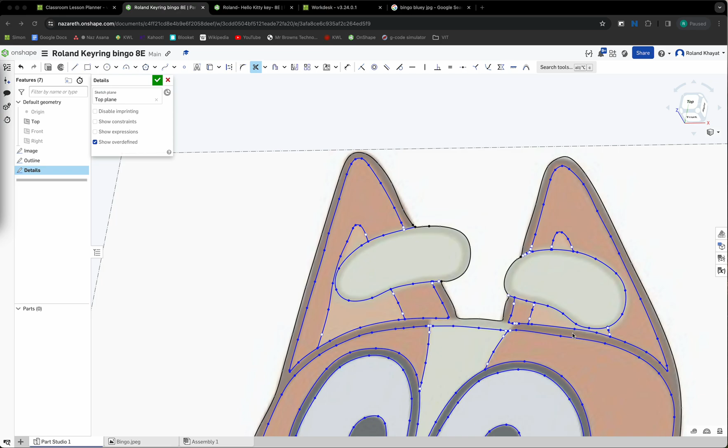Okay, so I've been drawing for a little while here and I've drawn all of the details. I've just gone around both sides there, and there's a line there, and they're all enclosed as possible, so there's no lines just sitting, not ending anywhere. Everything's connecting - this connects to here, connecting to there, creating a surface here, a surface in there. There's a surface there, there's a surface there. This surface here connects around - that's a big complicated one, but it goes all the way around there, so it's all connected.

And I just click the little green button so it saves it. And then here I can kind of highlight a little bit better so you can see what I'm saying. If I go... oh, okay, it's not doing it.

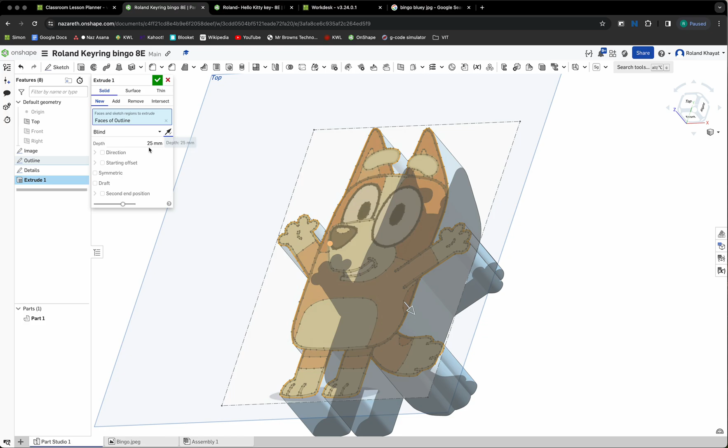Anyway, so now that we've created the details, what we're going to do is go to the outline and extrude. This extrude button, we need to go in the opposite direction, and we're going to go 4 millimeters.

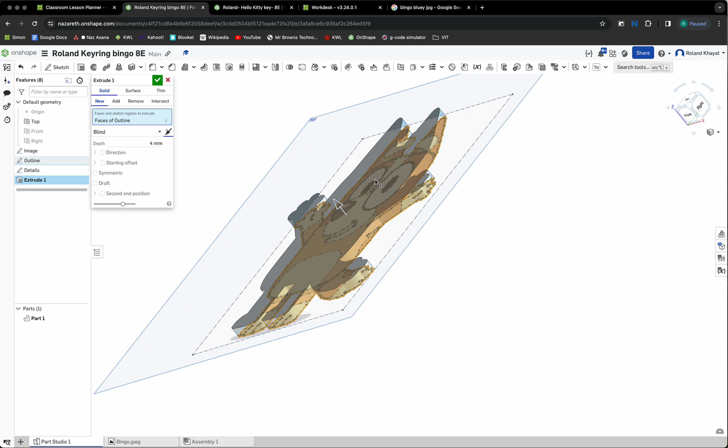So you can see that the drawing is here and it's going in that direction. We don't want it to go there, because then the part is on top of our drawing and we can't take the details out. So we need to go in the opposite direction so it's underneath, and then we could take the details out.

So extrude, so it's solid, new, that outline - that creates our base. Now the second thing that we want to do is extrude out the details.

So we're going to extrude. Now we want to add - and in here it says merge scope - we want to add to this part, so we're adding to that initial base bit. And then we're going to select which parts we want to extrude. So I'm just going to start off with this light sort of orange section.

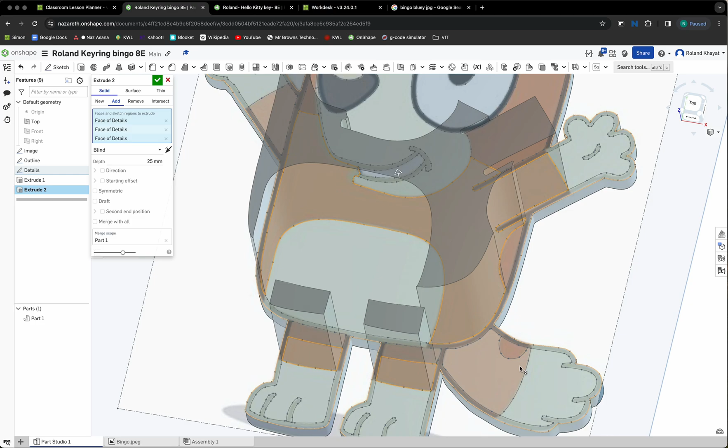So you can see it's kind of come out there - that's the light orange bit. Everything that's that color, I'm going to extrude it. You've got to kind of move the mouse around until it highlights what you want. All right, what else have I got? There's her other arm.

All right, so we don't want it to be 25, we want it to be, I don't know, let's just say 0.5. All right, so it's just coming out. That bit is going to be 0.5. Is that all right, all the same color?

Oh, actually, of course, I got these bits - that bit, and that bit, and that bit. So they're all 0.5, they're all coming out. They've all sort of come out a little bit. So now I want to do the black bits.

So wait a second - once I've done the extrude, it's going to hide the sketch. So we want to show the sketch again, and then we're going to do another extrude, and this is add, merge scope, the part, and then we're going to add the bits. So now we want to do the black bits.

So we're going to go to that bit again. The whole point here is that each bit that we go in and out is at a different thickness from the other color, so that when we print it, they will show at a different thickness. So that one was 0.5, this one we're going to make it 0.8 - all of the black is going to be 0.8.

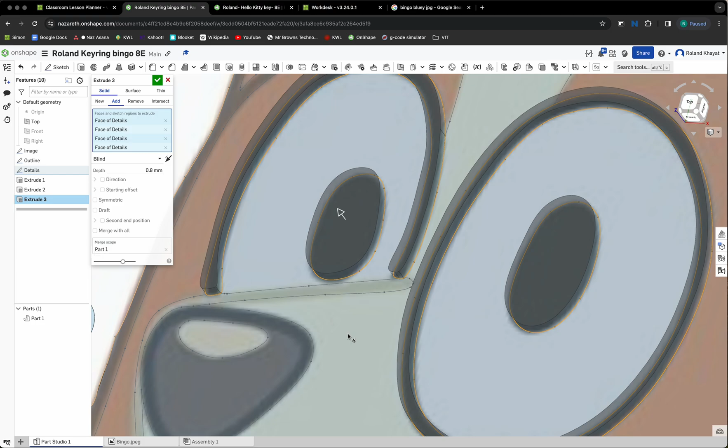Damn it. All right, so this is kind of the tricky bit, getting it to only select the bits that you want it to select. All right, so those bits are black. Actually, we're going to do the whole outside, so I don't know if it... hopefully I've done it right.

Oh, there you go, it's gone red, so there's something gone wrong here. There's something wrong with that line. I'm going to investigate - anyway, so I can hide this. So it was this sort of surface here, it's got a hole in it somewhere. All right, it's not working.

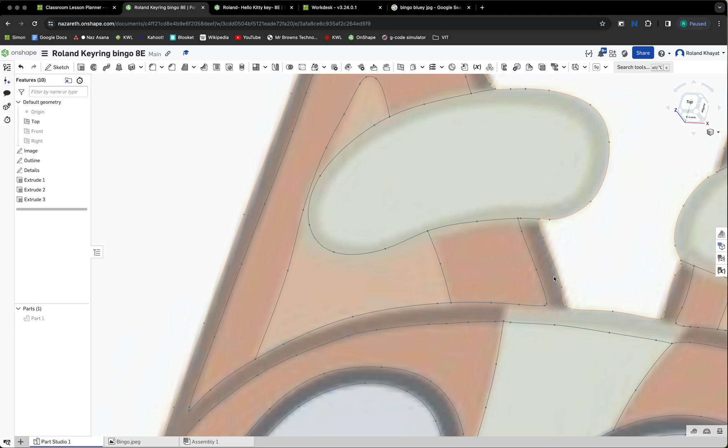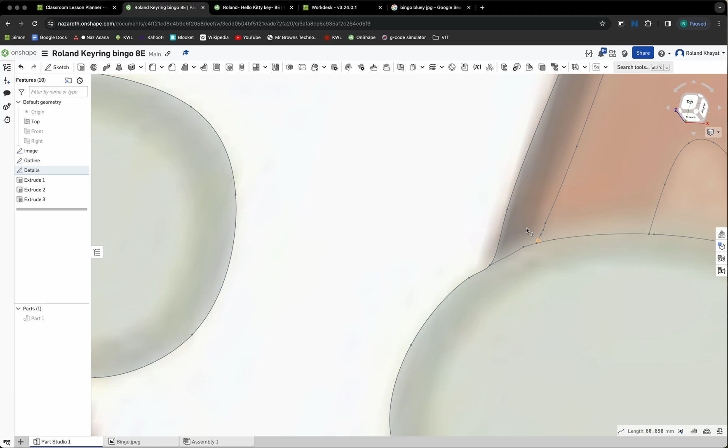All right, so I'm going to hide this part - this is probably the most complicated bit. So here it's closed, I'm just investigating - so that goes to this bit here, connects all around there, connects to there, which goes up and around to there. That's okay. Connects down to here. Yeah, I mean, this is a complicated shape.

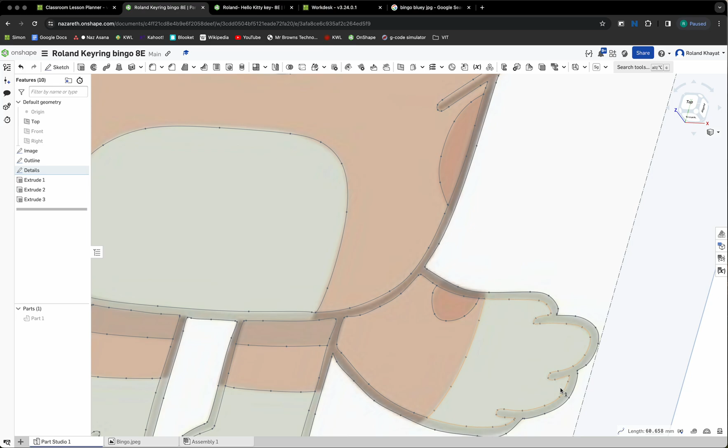All right, connects to there, connects all around in there. Strange, anyway, it does that, goes through there. Alright, that all looks okay. This bit here looks weird, so I need to get rid of this bottom line - it doesn't like these two line things.

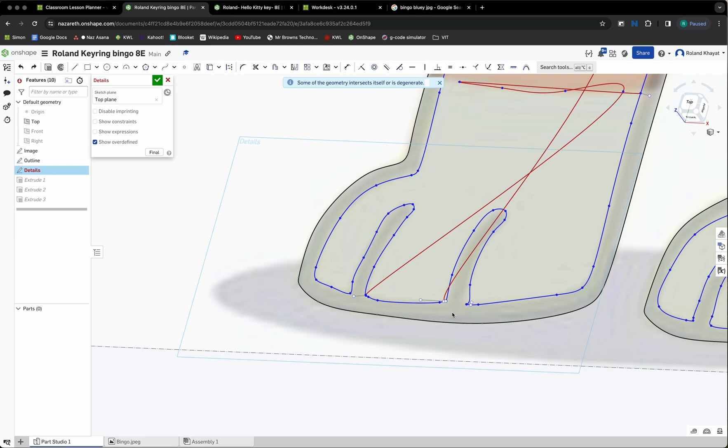So we've got to go into the detail sketch, use the trim tool, and I'm going to get rid of that bottom line. Alright, actually I'll get rid of that as well, because that's all part of it. Whoa, okay, didn't like that - Control Z. So as I said before, when it has constraints and things, it kind of messes things up. So it's a bit of playing around to get it to work.

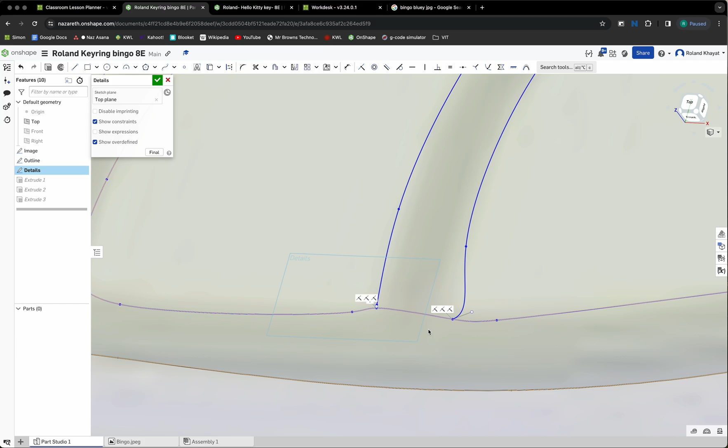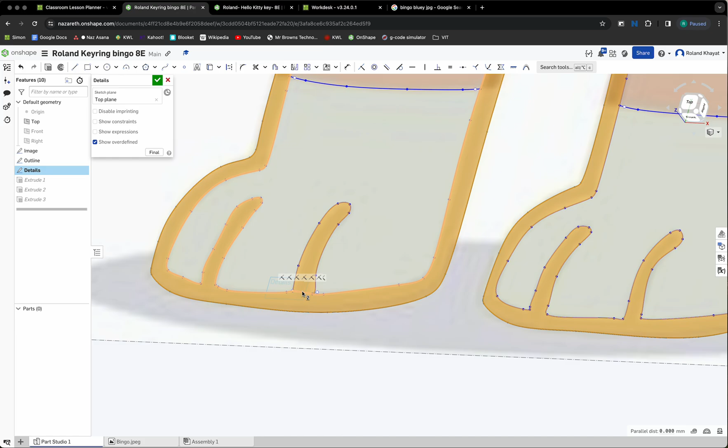I might just leave it. All right, so now it's working anyway - you can see it's highlighting just the bits that I want to highlight. It was that overlap that was weird, so I might just have to click this bit separately, because if I delete that line, it falls apart. Anyway, so I've highlighted the bit that I want it to be black.

I'm going to extrude it, and I was extruding it at 0.8, and it's going to add, and the merge scope is this part 1. Oh, okay - all right, it doesn't like it for some reason. All right, I can just make it new - it's not ideal, but if that's the only way that it's going to work, then we'll do that.

All right, so basically what I've got to do is just keep getting the different bits and bringing them up to be different levels, and then eventually - so you can see I've got some of the detail, but I've got to get the rest of her nose and the eyebrows working and the little details there so that we can see the rest of her. I'll continue doing that, and I'll check in a bit, but yeah, different details - this is the most complicated part. Different bits, different colors at different heights, and then they should show up.